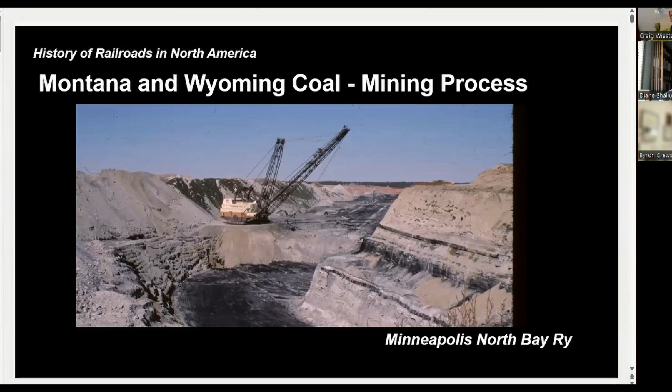So we got into this. If you remember, we were talking about the Chicago, Burlington, and Quincy, and the Colorado and Southern, and so we were talking about the lines that come up through Nebraska, through South Dakota, that went up to Billings, and they went to Billings because the Great Northern came in there, and of course the main line of the Northern Pacific is here, and of course the Great Northern and Northern Pacific owned the Burlington.

And then the Burlington, in turn, had purchased the Colorado and Southern, which goes basically from here to Denver, down to the Colorado state line, and then into Texas, all the way to Galveston, Texas. But it went through these coal areas, and Northern Pacific had been using this coal for some time, and that's why they had the huge fireboxes in their engines, because they owned it. Remember, they had this checkerboard of land all across Montana, and they own the coal. They still do in some areas.

Well, I found a slide. I was at a meeting in the 70s when Northern States Power was proposing. This is actually from a 35 millimeter slide from a presentation, and so they were proposing to haul coal from Montana to Minneapolis and St. Paul, where all the power plants were, because at that time they were bringing coal in from West Virginia, Oklahoma, Illinois, Indiana, Kentucky. They were burning the bituminous coal.

And they were saying, well, gee, this is low sulfur coal, because of course, again, they were having to lower their sulfur emissions. And so this was as they were discussing it. And obviously they went, and Northern States Power was one of the early utilities to burn the Western coal, and it was a challenge, because it's not as many BTUs, and it's dusty and it's hard to handle, but it's low sulfur and it's low cost.

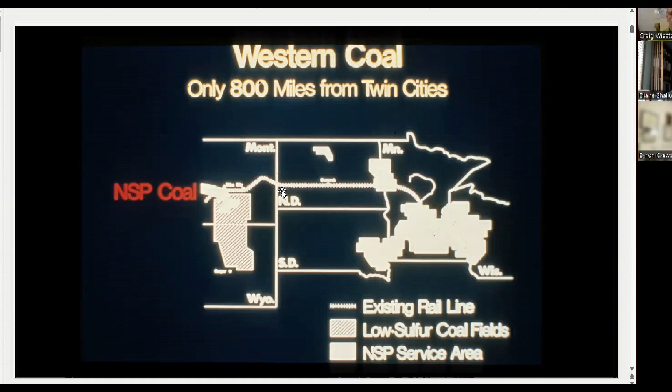So thought we'd look at the mining process, and basically this process is the same for any resource, whether you're mining coal or iron or copper or diamonds or whatever. Pretty much the same process. The geologists study the geology, and they sort of know, based on the topographic features, what's underneath generally. They drill core samples, and then they map the samples, and they have to be careful how they do that, because they map every few hundred feet or whatever. They drill holes and map it.

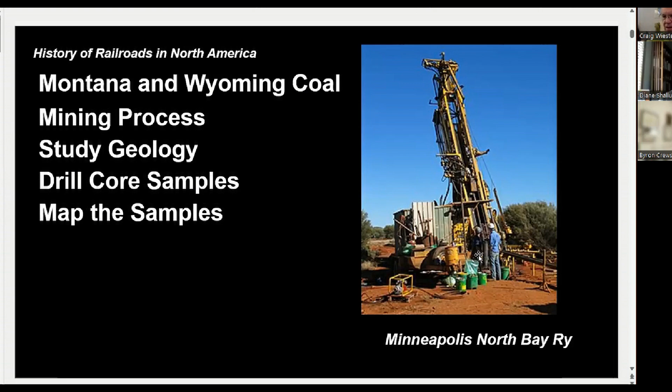And I was involved with a project in Australia where it looked like the seam ran north and south. And so they had drilled a whole bunch of holes here. Well, it was really wide down here, but then the seam kind of tapered, it almost looked like this. And so they're mining a big wide area, and all of a sudden, oops, there's only a little bit, and they found out that the seam turned and went east, and they only had this much land leased. And so I remember going into a meeting with about 30 people in Brisbane, and about half of them were lawyers. It took a little bit to settle that mess.

But anyway, once they've mapped it, then they have to clear the overburden. And the big thing about Western coal, here's the overburden, but here's the resource. Out east, I had mentioned that I talked to this mining engineer who had worked in Pennsylvania and West Virginia, and he joked that in Pennsylvania you go down 80 feet and you get 3 feet of coal. Here you go down 3 feet and you get 80 feet of coal. Well, it's not quite that extreme, but these are huge seams of coal, because this was kind of a swampy area for millions of years, and all that vegetation became coal.

Well, then after they get done mining, basically they start reclaiming the land. Before they start mining, they take off the topsoil, and so after they get done mining, they flatten the area out, make it look smooth, and they put the topsoil back down, and then they spread grass on it. And it basically looks similar to the way it did before, except it's about 30 feet lower, or 40 feet, or 50 feet lower.

So then the first thing they have to do when they start clearing the overburden is you have this big drill, and we watched them drill, and then this truck with explosive, I think it was liquid TNT or whatever, shows up, and we decided to walk away at that point. I didn't want to be around it.

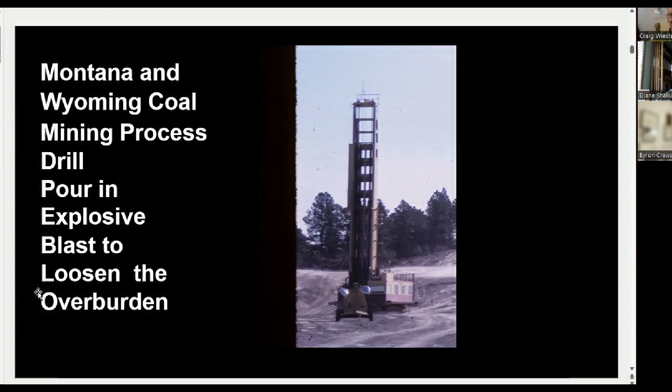It was a big tank truck, and they pour this liquid explosive into the hole, and they put a plug on it, and then they put a blasting cap on, and then they go down to the next one. And so here they have all these holes dug and they're full of explosive, and then they blow a horn, and everybody has to turn off their phones and radios and everything else,

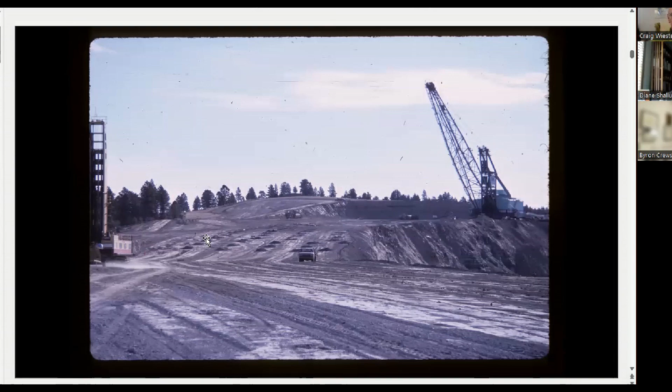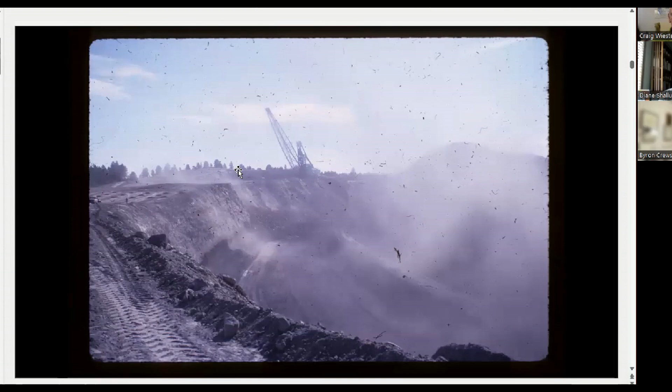and then they energize these things, and then they set them off, and it goes boom, boom, boom, boom, like this, and that's how they loosen the overburden. I mean, it's like a small earthquake. Well, then they can go in there with these big drag lines, and it's just like gravel then, because it's loose. And the drag line looks basically like a drag line from 100 years ago, except that it's about 50 times bigger. And it's still the same process.

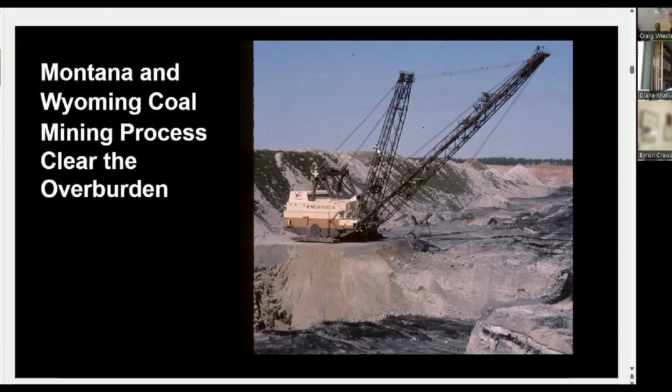You got this big long boom, and the operator's here. He's got a cable here that pulls the bucket. And so he just lets this cable go, and this thing swings way out there. He drops it, and he gets material, and then he drags it back towards the cab. He turns the whole unit and dumps it. And you keep doing that all day, and you can move a lot of material.

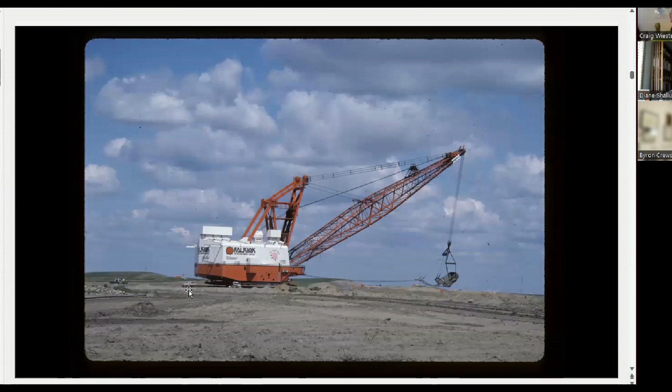When we first drove up to this thing, I thought, oh, there's a crane. That's interesting. And then all of a sudden I looked, and oh, that's a truck. So I realized this thing is kind of big. It's huge. And so here we're standing here, and it's working away. And these are the guys from NSP, and there were two ladies who were the mining engineers, really smart, and they were telling us the whole process and everything. They gave us a tour,

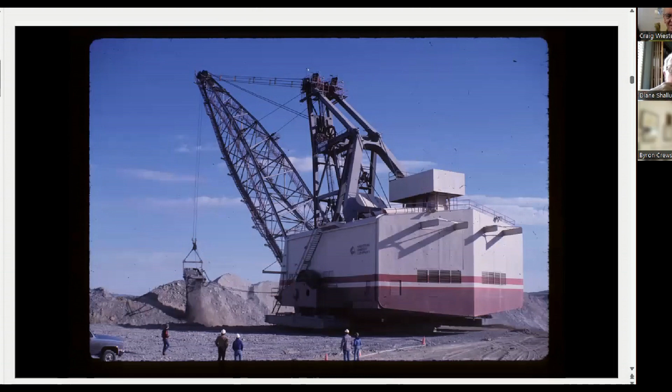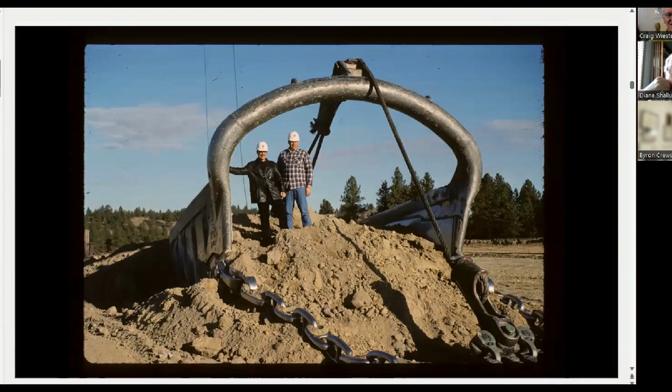and so here's the bucket he uses. It's like a small house, and so he pulls that thing up, and look at the chain. I mean, he dumps it, and then he pulls it up and dumps it again. And so to get on board, it's just like going into a building. The thing is, that thing's bigger than my apartment building, man. Yeah, it is. And so we said, well, how do they move it?

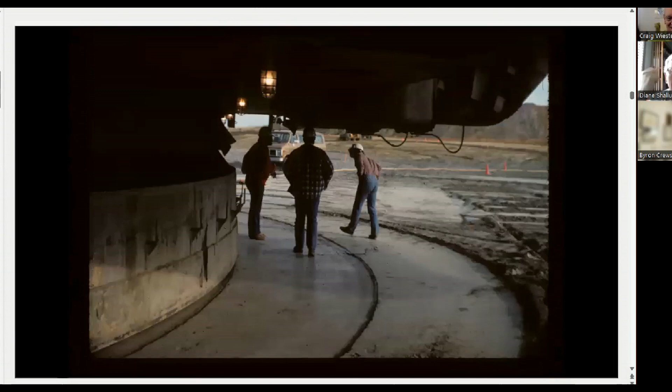Well, there's these shoes, just like a steam engine. There's this big thing. This turns very slowly. It pushes this down, and then it moves the shoe like this, and then it raises the shoe again. And so you can see here it was over here. Then it moves one length, and then another length, and then another length, and so it moves about, I don't know, is that 4 feet? And of course they have the area flat for it, but when they set that 1,000,000 pounds on it, it gets pretty hard. It's very impressive, and they move that thing around.

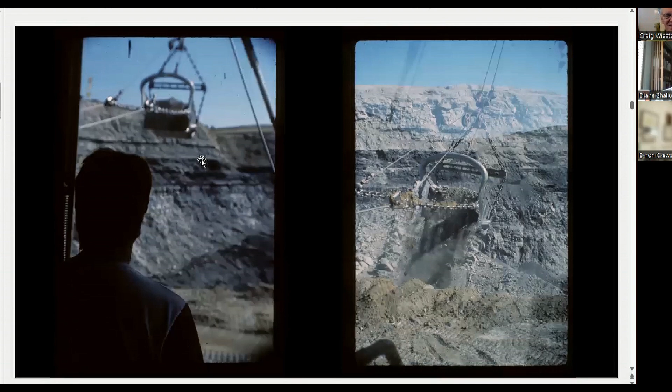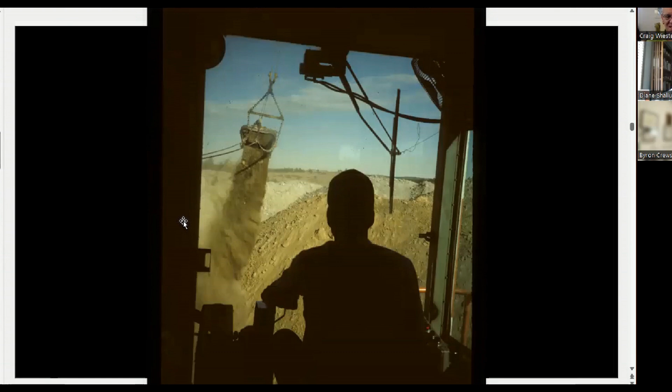So here's the operator in the cab. He's swinging the bucket out, and then he drops it down, pulls it, and then he dumps it. He turned the whole crane, and then he dumped it. And so he's taking overburden from over here, and then dumping it over there. And so after a while, he's down to coal.

And then they have to go and repeat the drilling process again. They drill holes, fill them with explosive. The explosive tank truck comes over, and then they put blasting caps on, and they blast the coal, because they have to loosen the coal. It can be pretty hard. And once they loosen it, then they can go in with a shovel or a front end loader or something like that. So they call this mine a truck and shovel.

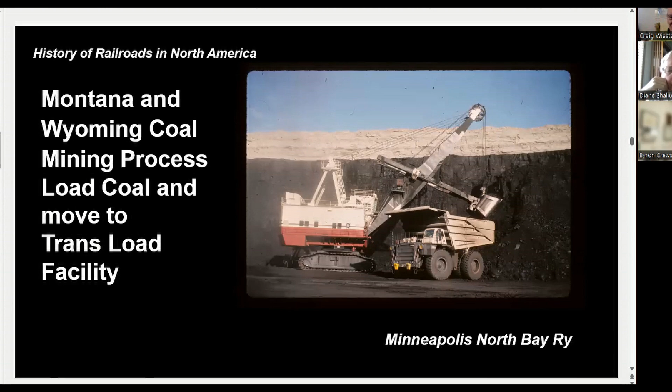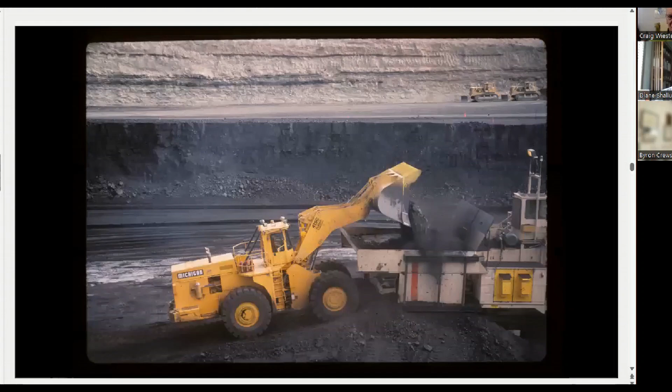and they move pretty fast, and they just pick it up, and then they bring it over here, and then they dump it in this hopper, and the hopper grinds it up a little bit just to make sure they get rid of the big chunks, and then distribute it on a conveyor belt.

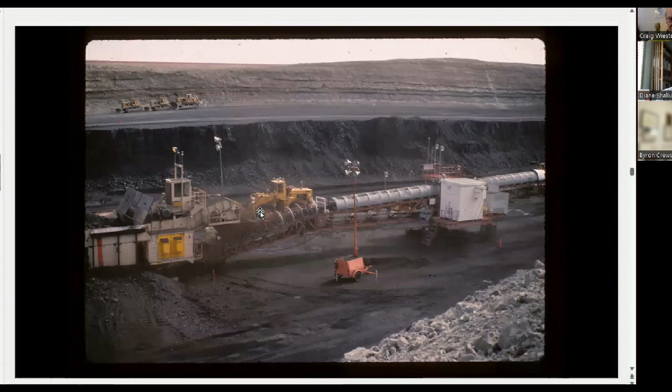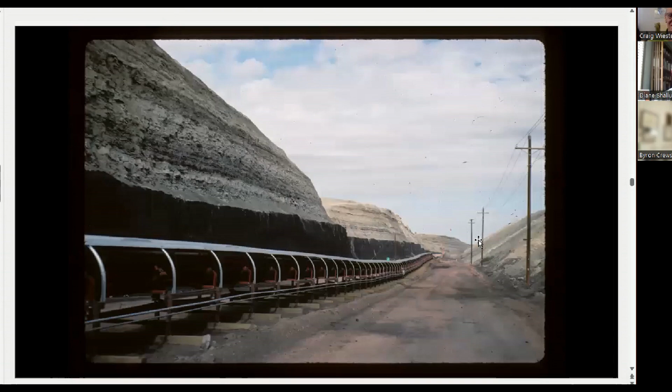This particular mine didn't use big trucks. They had a long conveyor belt, and the thing sits on crawlers, so they can move it around. Every few hours they move it, and then there was like a mile of conveyor belt. You can run these conveyor belts quite a ways, and so it runs. They have mined this area, and they're going to mine this area over here.

Now this is an area where the big crane has dug all this out, and now they have all this coal, and so they're starting to work with a smaller shovel to pick up the coal. You can see this is probably 30, 40, 50 feet deep, as opposed to the seams out east, which can be 6, 8, 10 feet deep. So that's why it's pretty low cost and pretty consistent too. The ash is 5, 6, 7, 8%, sometimes 10%, but it's pretty consistent.

It's about 8,500 to 8,800 BTUs per pound, whereas the bituminous coal is about 12,000. So it's only about 2/3 of the BTUs, but it's about 1/5 to 1/10 of the sulfur. And of course the mercury is less, other minerals are less, so it's much cleaner, and it's about 1/4 of the cost at the mine.

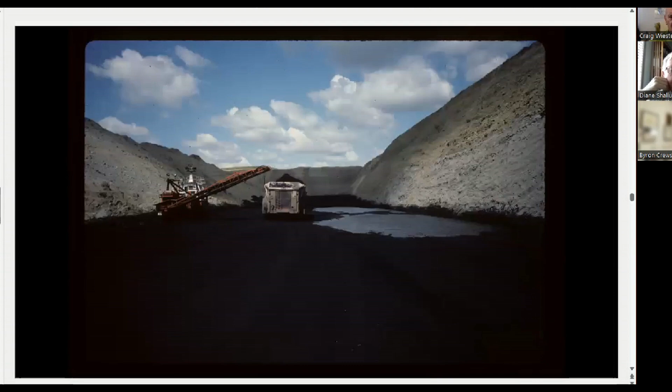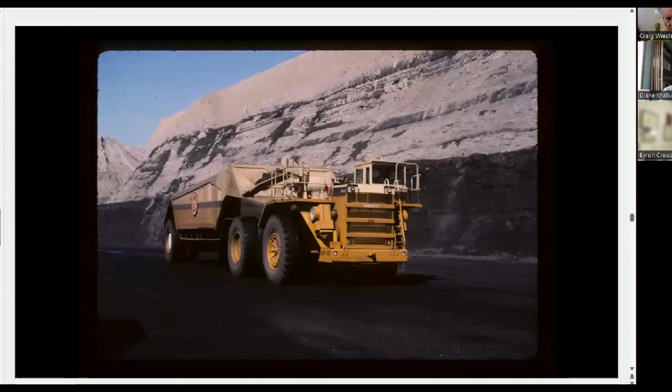It's pretty reasonable. Here they're using some kind of a machine to fill the scrapers, and they have these coal loaders with an engine in front and an engine in back and 8 tires, and they can haul 100 and something tons of coal in that thing. Wow. Yeah, and that's what they have to do, because they move a lot of coal.

Here's a big shovel, and this is a 250-ton dump truck, and it has a General Motors 645 cubic inch diesel locomotive engine in front and a generator, and it has traction motors on each tire, because driving on squeezing tires is much more resistance than you get moving a coal car, so it has to have a lot of horsepower. So that's a GP40 on rubber tires. Yeah, GP40 on rubber tires. That's what it is.

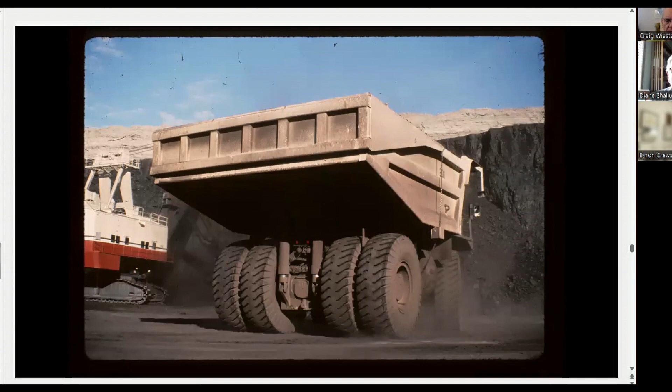And here's the bucket on the coal shovel. It's pretty good size, so they can move a lot of material. He filled this thing, and then the driver backed it up very expertly and headed up towards the front, and here she is in the cab. She's about 35. She's been doing this for about 15 years.

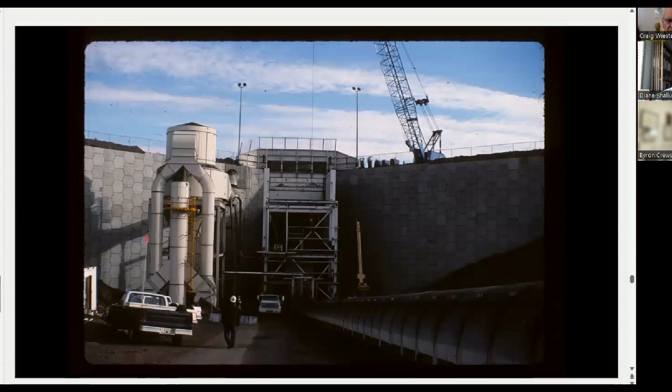The mine manager told us that she's the finest driver he's ever seen. She operates the equipment very smoothly. She has the least amount of maintenance on her stuff, and she also trains the other drivers. She just is a natural. So she drove this thing up there, backs it up and dumps the 250 tons of coal into this hopper, and then it distributes it on a conveyor belt.

Then he waved her over, and she came over and talked to us. She's quite an interesting woman, and she absolutely loves doing it. This is where she dumps the coal. Then it has to distribute it on the conveyor belt that goes up to the place where they store it, and also to the train loading.

Now you'll notice a dust collector. That's one problem with the Western coal. It breaks up easily, very friable, so there's a lot of dust. You can see these pipes are sucking. They have hoods over everything down here, sucking air into this dust collector that has filter bags, just like a vacuum cleaner. It collects the dust on the outside, then they shake them, it falls down, and they put it back on the belt.

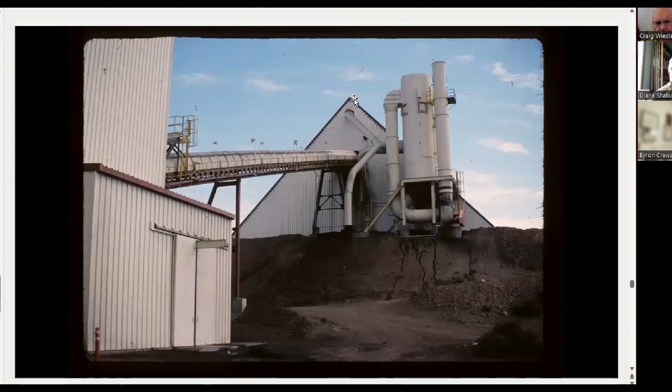Here they have a coal barn to store it, because sometimes it rains and the stuff gets really weird when it rains, so they want to keep it dry. So when a train comes, they want to be able to put the coal in the train. That's the big thing they want to be able to do.